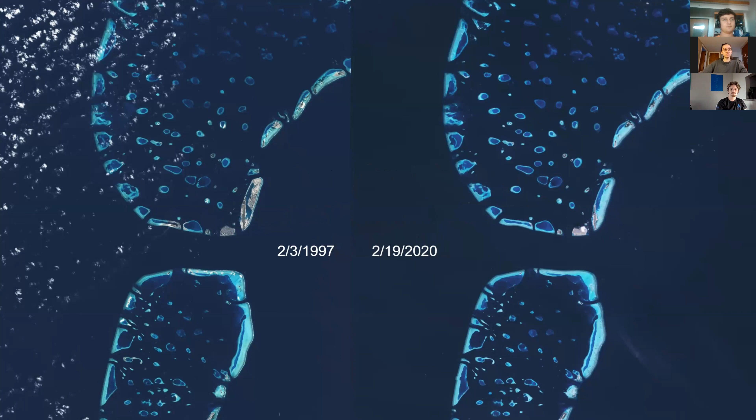I wanted to show this picture first. These are two images of the same shot of the Maldives. The left picture is from 2020 and the right picture is from 1997, which I found kind of interesting, and I actually captioned it the way I initially would have thought. On the right, there's not a lot of island left, but on the left, there's quite a lot more populated area, which doesn't make a ton of sense to me, because the Maldives is less than a meter, I think they said, above sea level.

So they are at a very high risk of being completely underwater by 2050. There's a pretty large chance of that happening. So they are working to build artificial islands. This right island is an artificial island. I'm not even going to try to pronounce that. But they are doing this by digging up sand from the seafloor and pumping it up to reconstruct these islands, basically just make them taller.

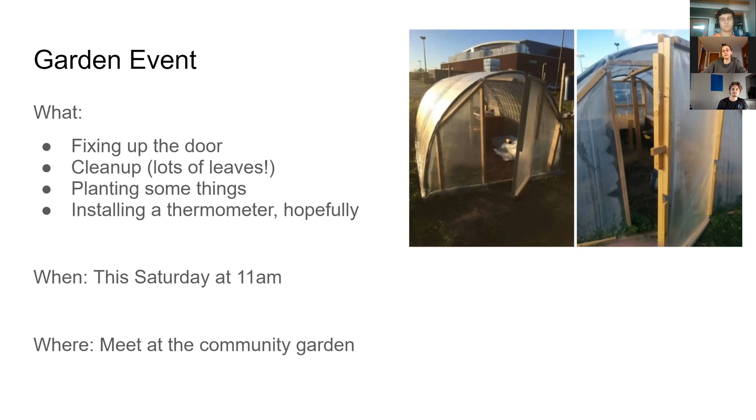Next thing is that this Friday, RIT Sustainability and Net Impact are pairing to, I believe they're doing actually every Friday in Earth Month in April. They are going to be showing a sustainability movie. This is a documentary that talks about social entrepreneurship and sustainability economics, and the triple bottom line that businesses are really striving for. It seems like a really interesting film. So that will be Friday in Wegmans Theater, which is in the Magic Center, at 6 p.m.

I don't think I put a slide for it, but I did want to mention now, I believe it is the evening before, next Thursday is the recharge day. So I believe Wednesday night will be an event that the RIT Sustainability Committee is putting on, called Lights Out. It's basically an attempt to get everyone in dorms to shut their lights out for an hour.

Earth Hour is a different thing, that's actually in late March, but we wanted to do this for Earth Day. I believe it will be either 7 to 8 or 8 to 9 for that Earth Hour. They're actually going to be monitoring how much energy is being used by dorms around that time, so we can see the actual quantity of power saved. I believe there's also going to be something happening out on the Greek lawn at that time, so just so you guys are aware of that. I will have more information on that next week.

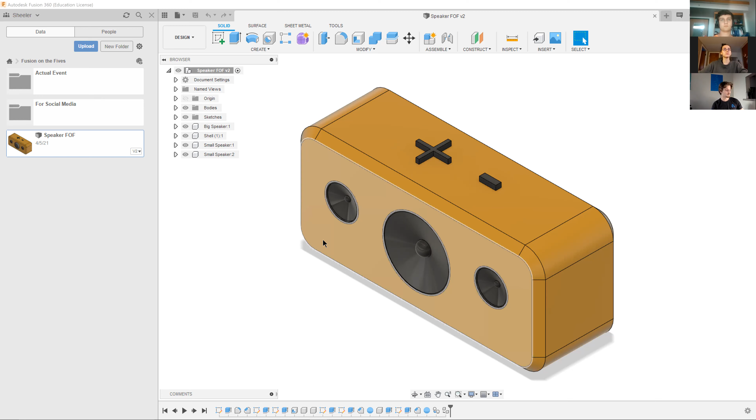So yes, what I have for you today is a speaker, a little bit of a portable speaker here. This will give you a good overview of what to expect within Fusion. We will cover a variety of different things going on here. But to jump into Fusion, I don't know how many people here have done SolidWorks or Rhino, or if you've never touched CAD, that's completely fine. One of the ways I like to look at it is once you've learned one CAD software, it's like learning another language. While sure, there may be some differences, you may be able to connect the dots where some things maybe overlap and be familiar of what you've seen before.

The way Fusion is set up is that it's very user-friendly in the sense that when you're welcomed to the program, you have a setup that will be welcoming you to tools that you'll be using most frequently. At the top, we have our solid modeling tools where create sketches, extrudes, we'll cover all of that in a quick second. Over here are where all your components are, where you will be able to model different aspects of the speaker itself, we have that over here.

At the bottom, we have a timeline, so if you do want to go back and edit something, if you want to go see what stage you were a few minutes ago, you can go back in time and visualize how it all comes together. We can also click progressively through here to see what we'll be working on here today, as it comes together.

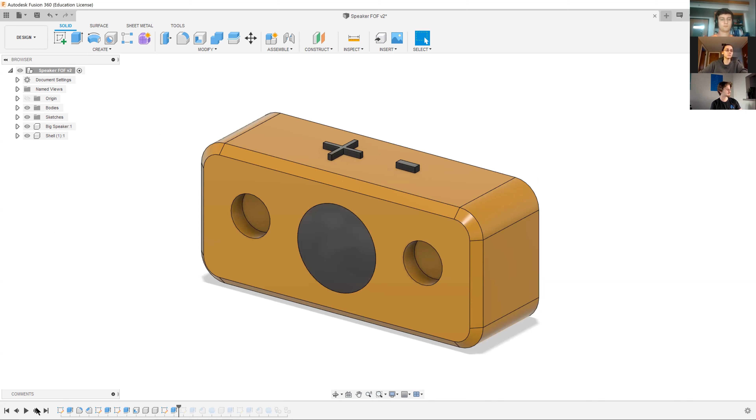Then over in the top right, we'll have a view cube, which you can drag around, or you can also click Shift and the mouse wheel and drag your model around. And if you want to select the front face, you can select the front of the cube, if you want to select the top, you can do that as well.

Just to kind of gauge with who I'm working with, do we have people that are following along or just sort of watching today? I think just watching for the most part. Okay, otherwise I'll go ahead and take progressive breaks, just stop, let people catch up. Otherwise, I'll just be going along with it. Sweet.

So we're going to first off start with creating a new document or a new file. We'll hit the new design up here, we can also go File, New Design. And we are going to name this Fusion event and Fusion demo. Today is the 13th.

When we save in Fusion, one of the great things is that it's cloud-based software, so when you save something, it saves to the cloud. If you log in on your computer at home or at school, you can transfer your files. The other benefit is that teams can work together on files, sort of like Google Docs, where everyone can add in different parts in different areas. That's another part of Fusion worth exploring if you have the opportunity.

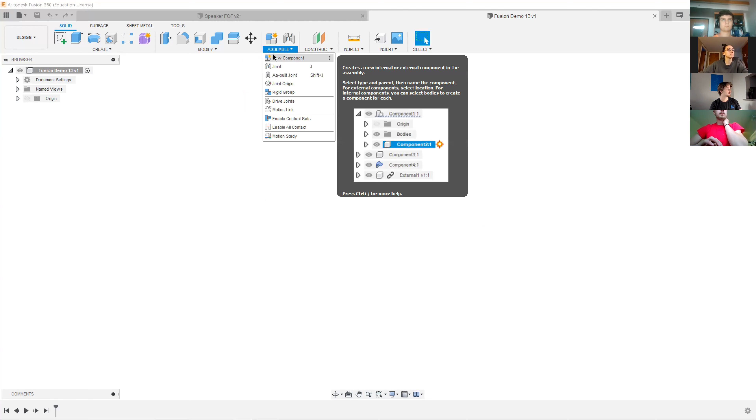So we'll go ahead and save it in our project file. Now we have our file ready to go. The first thing we're going to do is create a new component, and this will create an assembly. That is our parent component.

There are three kinds of breakdowns of parts within Fusion 360. You have your assembly, which is at the very top, which is your whole model. All your parts are combined together as one object. So if we turn that off, that's what we turn off.

The next step down is components, which are the modeling parts that you can combine and put together. The last one is bodies, which are sort of the blobs and parts that go together to create a component. So let's say you had a cylinder and a sphere - rather than those being two separate entities, a component is able to take those two bodies and put them together into one part.

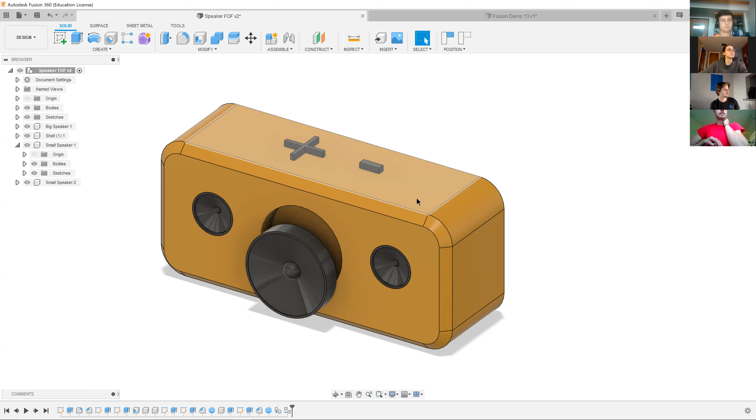So that's what we have going on here, where we have a sphere and a cylinder that have been combined into this component. Same goes for this main orange body here, where we subtracted from it and have both fillets and chamfers on it, and that's how we get our next component.

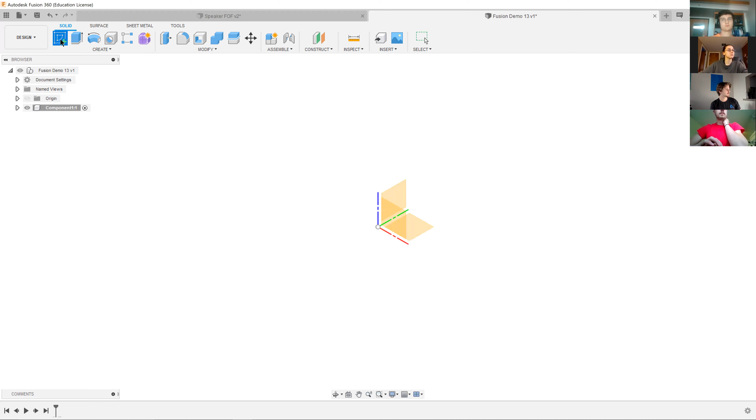So the first thing we're going to do is create a sketch. We're going to go to the top left or hit S. What we see now is three different planes that we can work on. So what we're going to want to do is select the front plane.

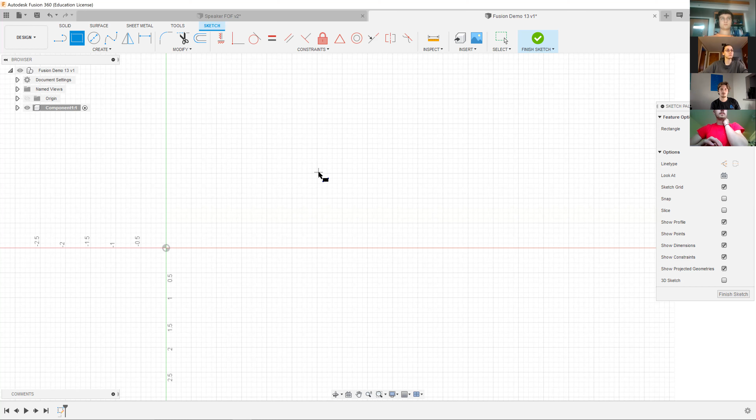We are going to go up to the top again and make a rectangle. Now we could click it anywhere, but what we want to do is, when we create objects, have them locked down in place. So I'm going to select the origin so it doesn't want to move on me. I'm going to zoom out a little and go big.

So now you'll see, maybe for those who have done SolidWorks, something similar, where the lines that are black are ones that are constrained - they don't want to move. The lines that are blue are the lines that do want to move. When we're creating objects, we want to try to constrain this object in its entirety.

So we want to go ahead and add some dimensions to it. But before we do that, we want to make sure what kind of unit we're in. Today we'll be working in inches, but if you wanted a different unit, we can also switch it over to centimeters or millimeters. It might be preset as millimeters, but we're going to want inches today. We'll hit OK on that.

Right? I think it's because I'm in inches that it's doing that. All right, cool. So the next thing we're going to want to do is put some constraints on this.

So we can go up to where we have our rectangle and go to the dimension icon, which is our sketch dimension tool. Also hit D as a keyboard shortcut. Now what I want to do for this is have this be 6 inches high, and then for width, I'm going to set it as 18 inches.

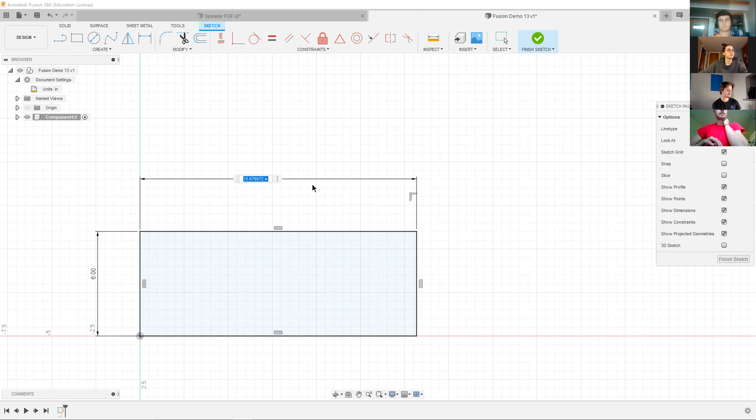And once I'm done with this, you can see that everything is constrained. I'm going to hit Finish Sketch.

So now we have our 2D plane. We can either mouse wheel and shift to drag around, or we can use the cube to see that we are in a 3-dimensional space right now.

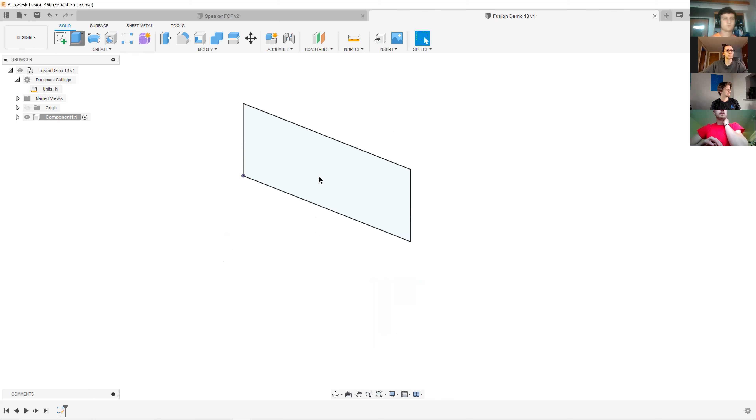We'll go ahead and drag this out a little bit to add some dimension to it. I'm going to make it 6 inches in depth, and I will hit Enter. You can see that we have made a cube.

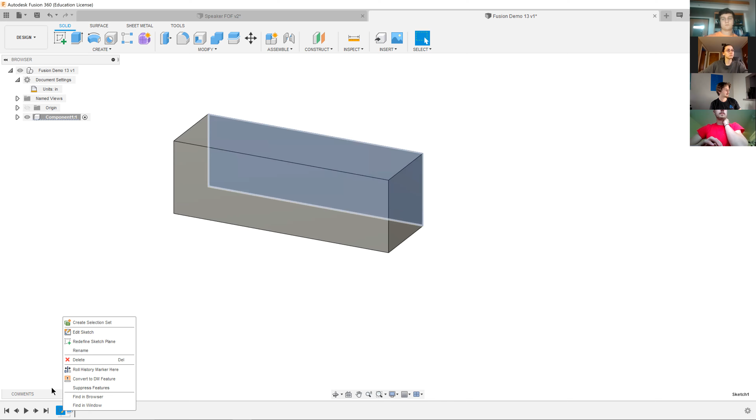Now I'm looking at the proportions of this, and I'm not entirely sure that I like what I've created so far. The reason I'm bringing this up is that when we have something like this that we want to tweak later on, we're able to go back within our timeline on the bottom and edit it. So if I right click and edit sketch, let's say I want to have this as 16 inches instead, it very easily updates, and you can see that now our rectangle is 16 inches as well.

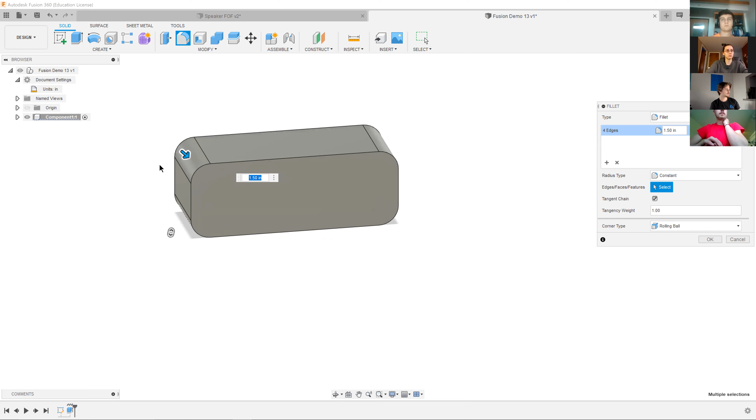Cool. So the next thing I'm going to do is add some fillets on the edges of this. I'm going to select the fillet, which is above modify, and select each of these outside edges. We can either type in a dimension over here, or we can eyeball it and drag it to the size we like. I'm going to have it as 1.5 inches. Enter.

We have some less sharp angles on it. Now to introduce another command, you can see that when we begin to enter the drop-down menus, there's a lot more to Fusion than just what meets the eye when we first began Fusion. We have all these variety of options.

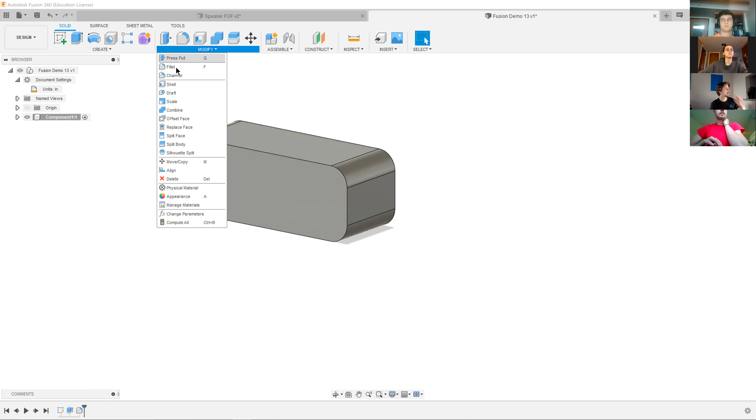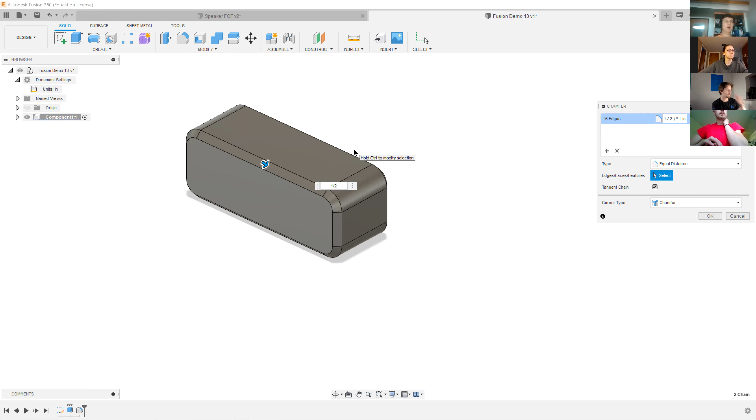What we're going to want to do is add a chamfer onto the front and on the back edge, again just like the fillet. That's a little too much, but we are going to make it 1/2 inch instead. You can either type in decimals, or you can actually have the program do math inside it, so you can do either fractions or decimals. There we go.

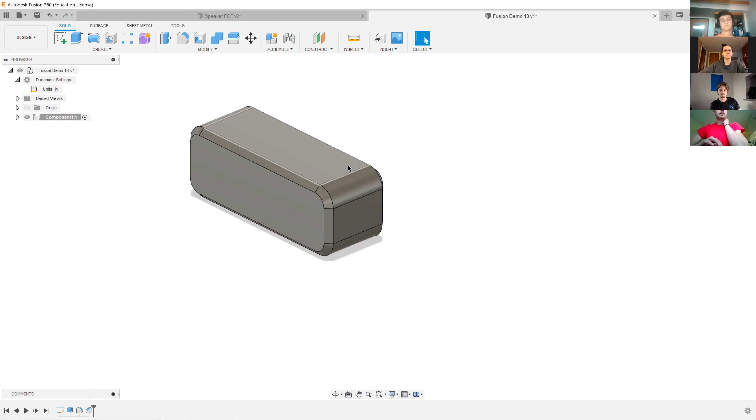Cool. So the next thing we're going to do is when we take a look at what we're trying to achieve, I am going to add the volume buttons on top.

Now, to add that, I'm going to add a sketch. Just like we did before with that back rectangle, we can select a face. We could even do this on the chamfer face, and add some volume buttons that are maybe more pointed at you, but we're going to do it at the top. You can see that the grid is positioning right where I want to put it, and we are on top.

Now I could draw out a plus and a minus, but for the sake of this exercise, I'm going to introduce you to how to add text onto your speaker. Before I jump into text, it's important that we anchor it down.

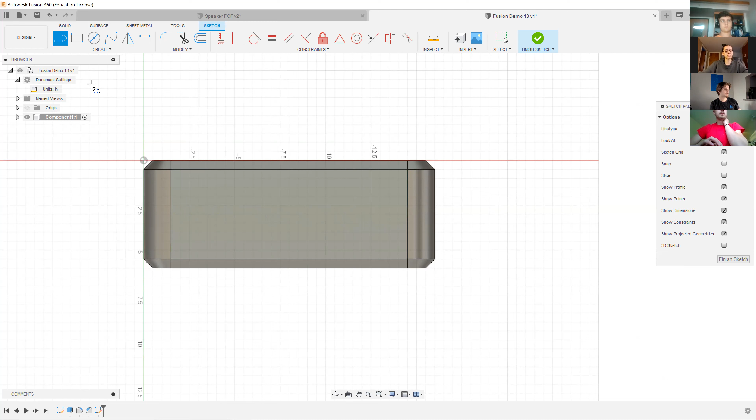So I'm going to add a center point. Now, putting down lines, I don't want the lines that we had previously. I want to have construction lines to help me position that aren't going to show up on the actual item. So the way I do that is we also have this menu over here with the sketch palette, and what we want to do is change the line type to construction.

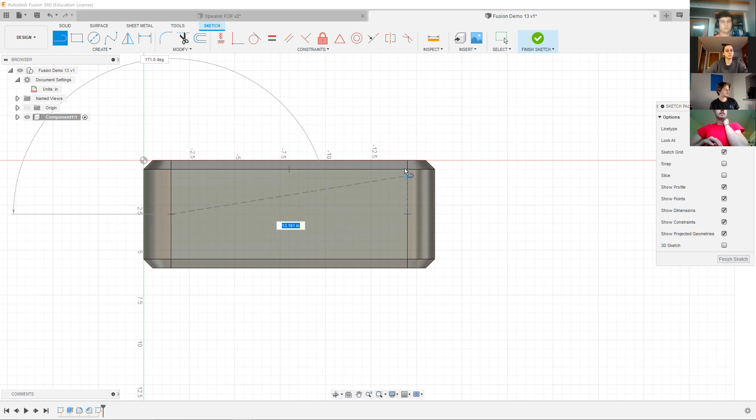So what we have here is you can see that now I'm drawing a dotted line, and I can hover over - do I want it in the top corner? It'll show a blue rectangle, and if I'm aiming for midpoint and perpendicular, it'll make those symbols as shown there. I'm going to do from the top to bottom as well, so I know that this is the midpoint, and I'll hit escape to get out of that command.

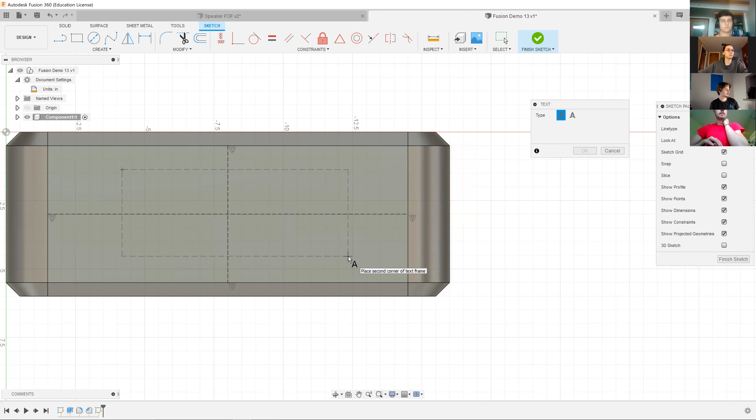Now to add the fun part, the text. I'm going to draw my text box in here. Zoom window. And for my alignment, I'm going to do center and align to middle.

For the text box, I'm going to do plus or minus. You can see how Arial - let's see, for height, I'm going to make it an inch. There's a lot to play around in here if you want different fonts.

Accidentally clicked out of it, so I'm just going to jump back in that menu by double clicking it. Now, I'm not sure I want Arial as my font, maybe something a little more dramatic, so we'll go for something like that. An inch is still not quite what I want - keep going a little larger.

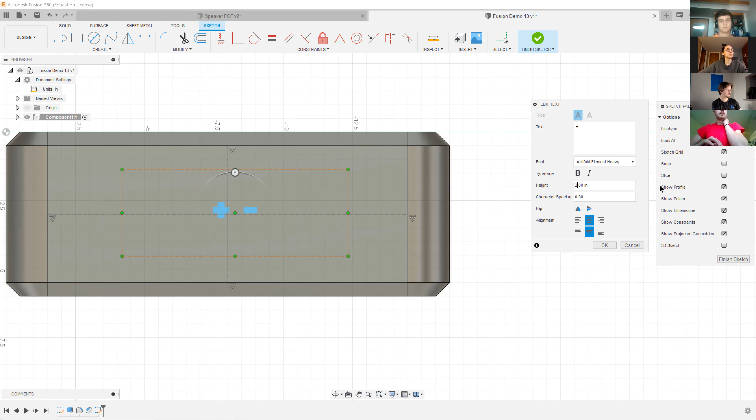And you can see that we can drag around our text box, and I want this point to be anchored there. We'll hit Finish Sketch.

And we have our sketch plane on top. Now, still 2D, and we're going to go ahead and extrude our text that we have there. So I'm going to do 1/4 of an inch.

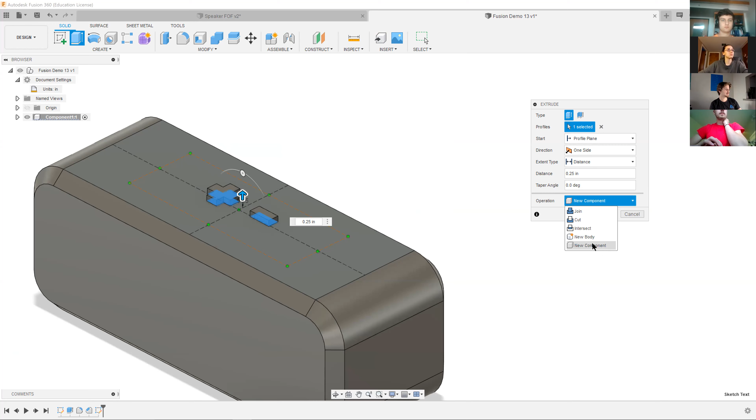We can either join this to our main component, but I'm actually going to make it a new component so that when we add color later, it won't turn orange with the rest of the body. These will represent separate buttons. So instead of a new body, I'm going to do a new component, and we'll hit OK.

Now it made a component inside of this assembly, creating these 3 objects in the assembly. But what we want is to drag this component back to Fusion Demo, so now you can see we have this component and this component underneath this assembly.

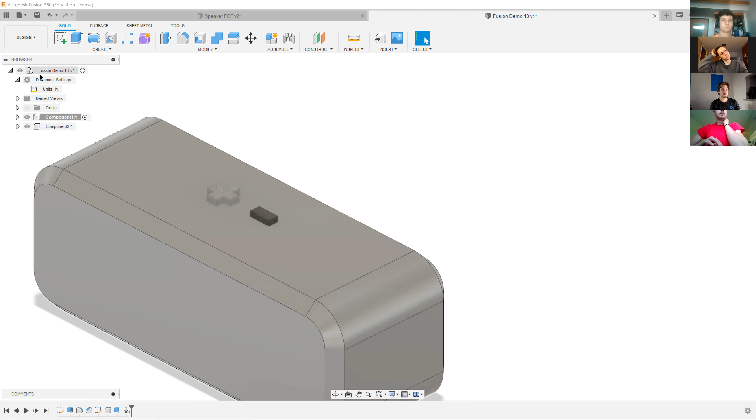Another thing to keep in mind is that now that we have multiple components, it's important to be working on the one that's active. To make it active, select the little dot next to it. So if we're working on the volume buttons, we'll have that selected; if working on the whole thing, have it all selected. Of course, we can always rename these.

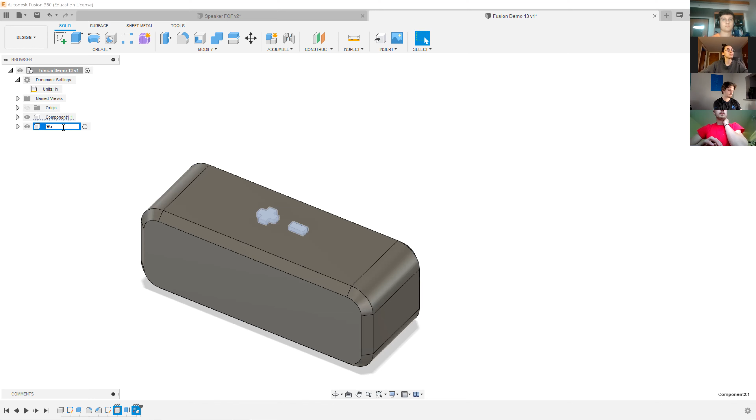So now I'm going to go back to make the base layer active so we know I'm working on this one. Another thing to note is when you select a different component, your timeline responds to that component rather than everything you've worked on, which makes things easier once you have a lot of components going on.

It combines everything, but if you just want to work on one part, it's easy to switch back to that. Next I'm going to create a shell, which will let me put the internal components inside so there's room for the internals. Actually, I'm jumping ahead—we're going to do that after this next step, sorry about that.

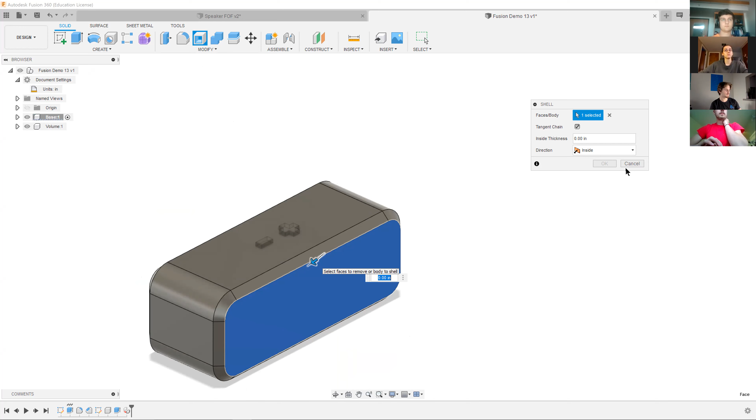We're actually going to create where the audio comes out. Create a sketch on the front plane, and we are going to create 3 circles—one for the base, and these 2 smaller ones.

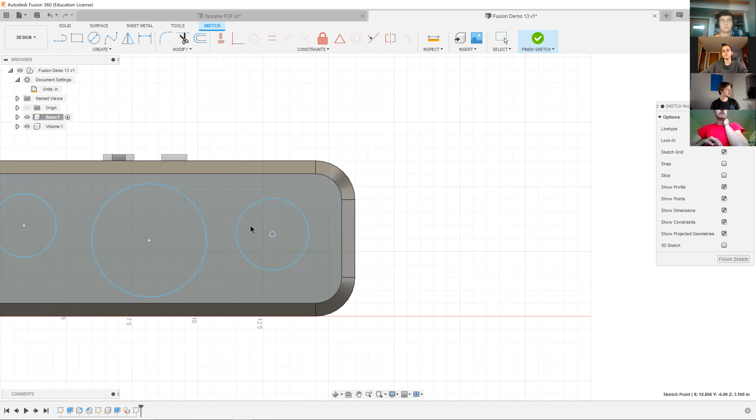You can see that these are just floating around, and I don't want these floating around. We can actually reduce our workflow by introducing another lesson, so I'm going to delete this if it wants to.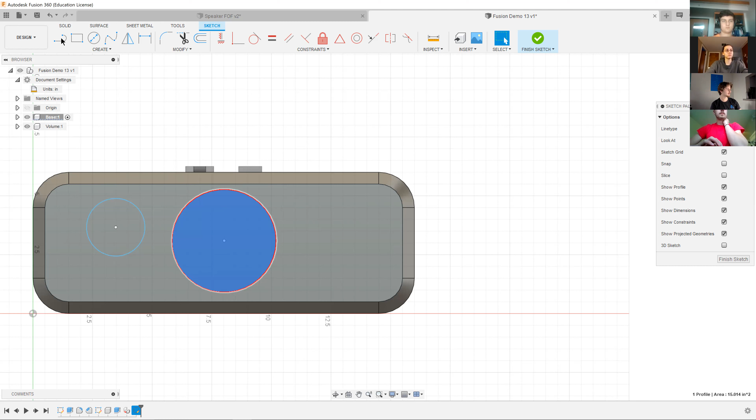The way I also do that is by right clicking on an object instead of constantly going up to the top bar—it gives you another menu that tries to guess what you're doing, maybe the command you just did, like delete, repeat delete, or pull this. That's another way to save time with small hacks to make life easier. So the first thing I'm going to do is center the circle and create a construction line.

I'm going to go to the top, try to find that midpoint—there it is, the triangle—and snap it to the bottom. I'm able to drag this around, but that's not what I want, so I'm going to drag it to the center point.

Now we have this column of all our constraints. So if I'm looking for something to be tangent, coincident, or a midpoint—midpoint is actually the one I'm after. I'm going to select the center point of this and the midpoint and the center line here. It's going to find the midpoint of those 2 parts and automatically snap it to the center. So now all that's up to me...

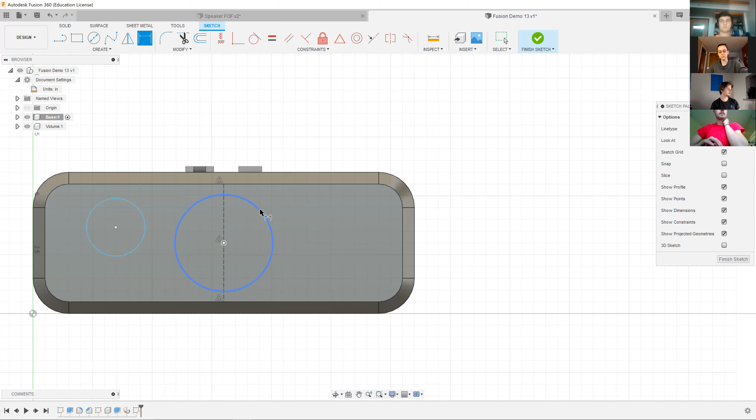...is deciding the size of the circle. I'm going to select the circle, but I'm not just going to type in a dimension for it—I'll decide whatever constraint I want later on. Just going to make the circle 5 inches. Too big. 4.5. Cool.

The next part, I'm going to add this—I'm going to anchor down this speaker, which I'll do by first creating a dimension from the center point here to here, and I'm going to make it 2.5 inches.

And from the top, same thing, 2.5 inches. Now for the size of the circle, 2.5 inches. Why not?

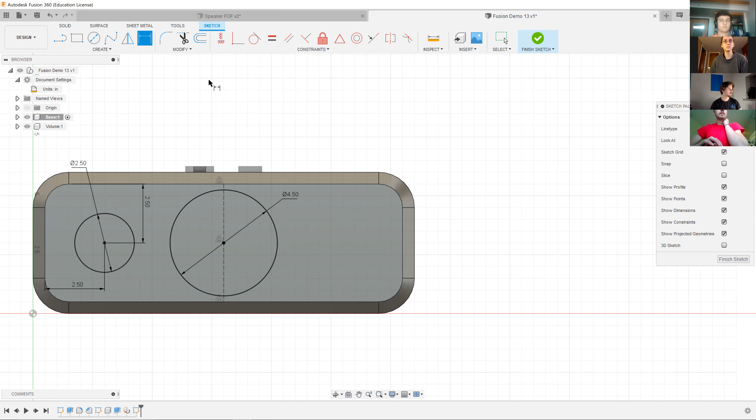Now I could go ahead and redraw this, do 3 dimensions on this side, but I don't really want to do that. The easy way to do it is to use the mirror command to mirror this circle. First, select the object and the mirror line, which works out great because we already drew that out. You can see that it immediately draws it over to the other side.

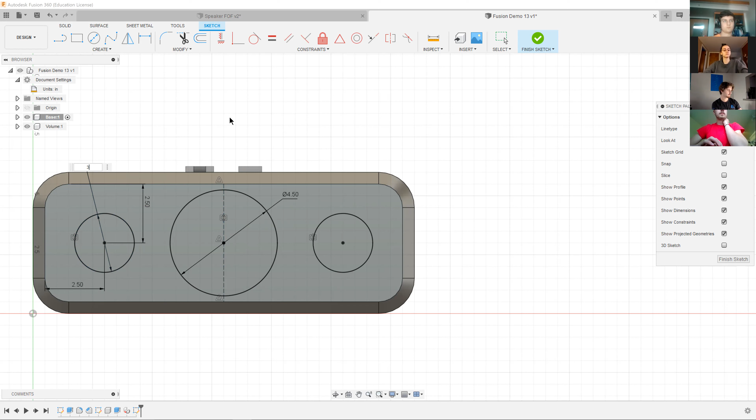One of the benefits to this is that if I want to change the circle to 3 inches, it automatically updates on the other side as well. That looks pretty good, so we will finish sketch. And now we have to extrude it.

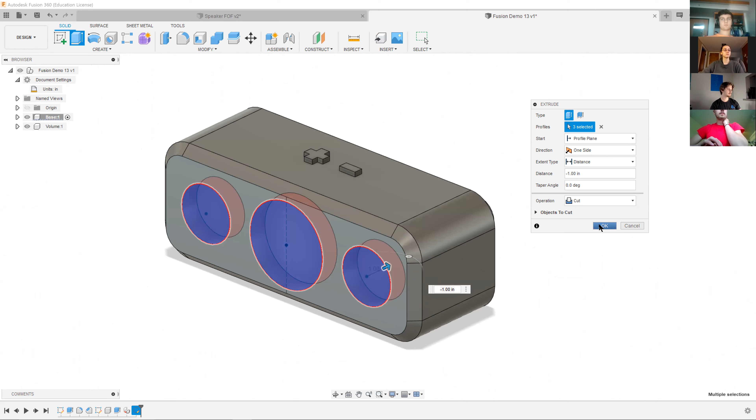While we created an object last time, this time we're going to subtract. We are going to go back 1 inch. We'll hit OK. Sweet.

Now, what I jumped a little ahead to last time was I wanted to shell the back for all the components. So again, on the modify tools, I'm going to go to shell, select the face we want. This is actually kind of fun. I'm going to type in 1/8 of an inch. What it's done is taken the shell of the inside, including the speakers we have here, and we'll now be able to put some inside guts into it. Hit OK.

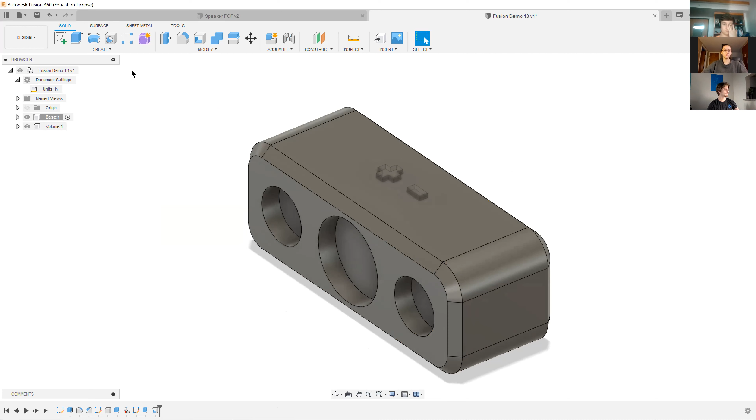So the next thing we're going to do is create the speakers we have inside here. What we want to do is create a new component, so we're going to make this part active of everything we're working on. Assemble, new component. That's the back one, so we are going to hit OK.

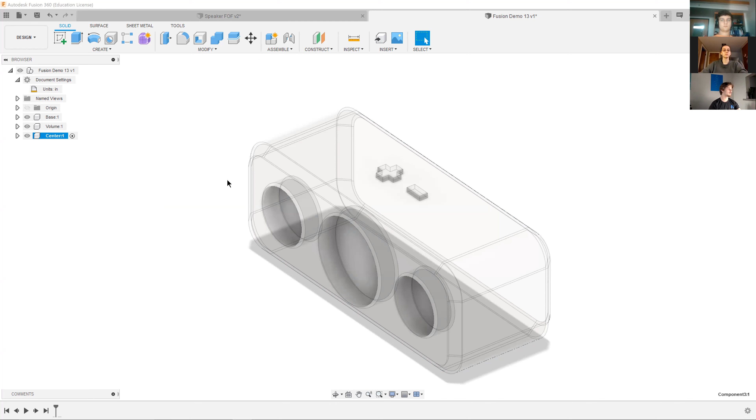And we have a new component that is able to be edited or begin on its journey. So I am going to create this as center, which will be where we create this back panel, or the center speaker. So we have this active. You can see we have this ghost of the speaker in the background, and we are going to begin by creating a sketch on the speaker plane.

We are going to actually—sorry. One helpful thing: if you have something on another component and you want to bring it to this one, you can hit P, which is the project command. So that makes this outer circle now onto this plane, so I can have and work on this circle as well. That's all I need there.

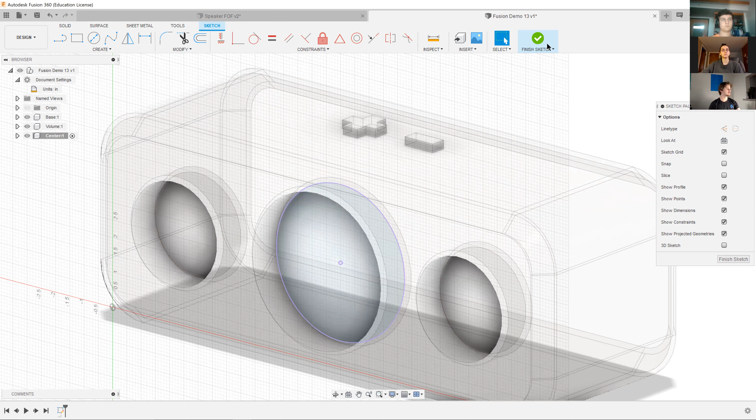I'm going to hit finish sketch and extrude. Now, I've kind of been avoiding everything else in this menu, but this is where it's helpful to start looking at what else Fusion has to offer within this command block.

Instead of entering 1 inch, which is what we know for how deep we went back, what if we change the circle in the future to 1.5 inches? We want this to automatically update too. So instead, under extent type, we can go to object. This asks us what object we want to go to, and we're able to extend all the way to the front plane. We'll hit OK. So now you can see no dimensions were added in.

It was just a matter of making sure that this face is flush with this face.

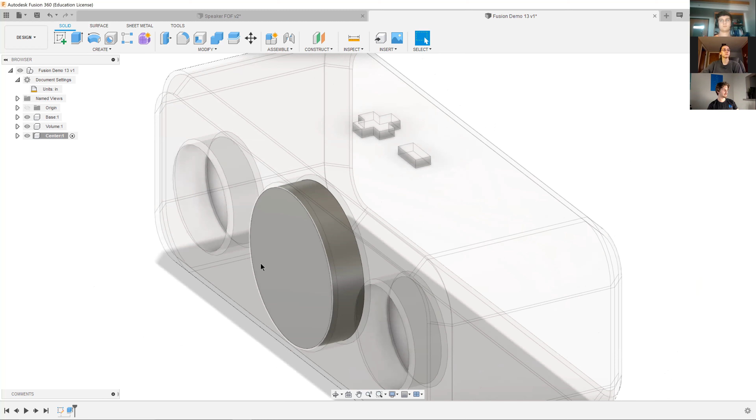Now we're going to create another sketch, and using what we just learned, we're going to use the project command by hitting P. We'll hit OK. So now we have this purple line, which is the circle that we have behind there.

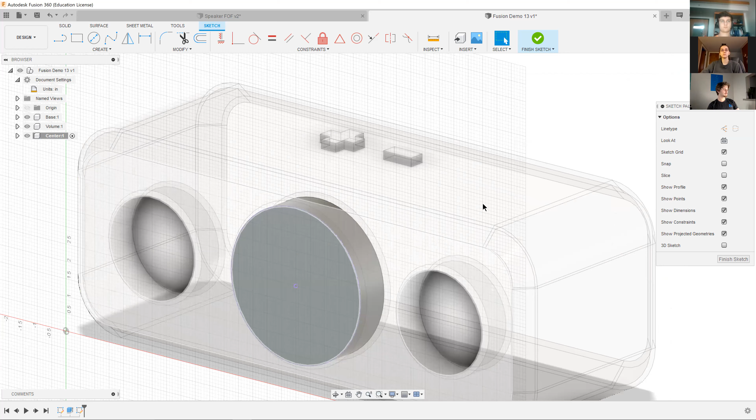Introducing a new item we haven't gone over yet: the offset command. Under modify, we're going to select this circle, and we just want it to go in a little bit. I'm going to say 1/4 of an inch. But you can see it went the wrong way there. The way to fix that is you can either do -1/4, or you can just flip it and it goes inside. We'll hit OK.

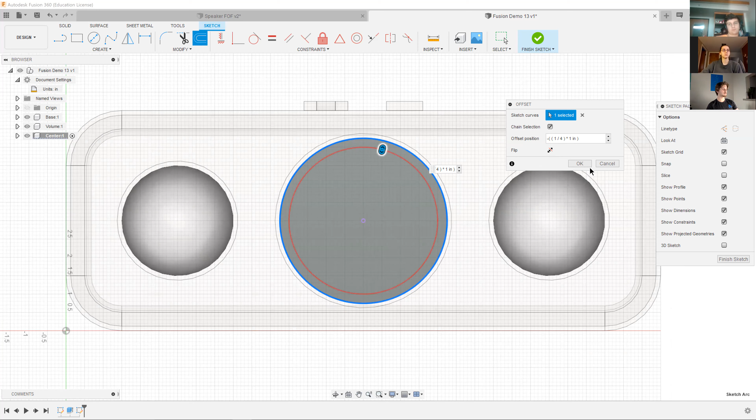Now, the reason we did that is so that we can create some depth within the inside of the speaker, so that we can use the modeling tool, the chamfer, to create this kind of shape we have going on, to give the representation of, hey, this is a speaker.

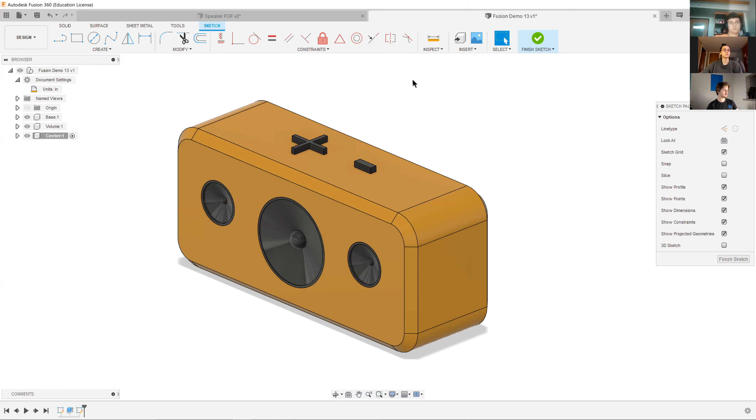Now what I'm going to do is finish the sketch and extrude again. This time I'm going to cut in. Just like last time where I didn't add a dimension, I'm going to do that again. But instead, I'm actually going to turn off my base since it's going to be a little in the way. And for the volume buttons, I only need this. I could cut all the way through, but I actually want to keep the back of this as well.

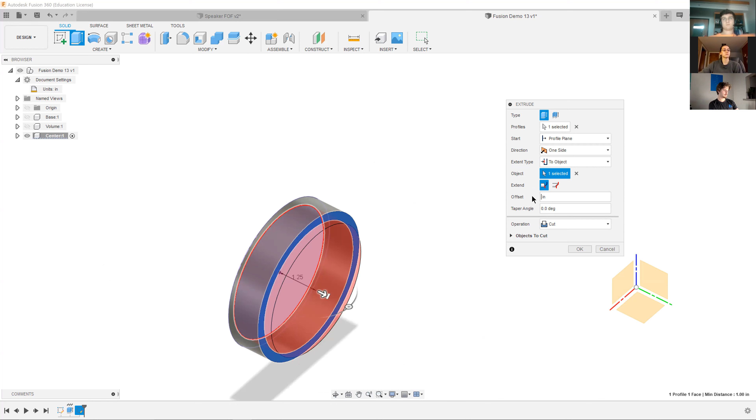So what I'm going to do is another offset object. I'm going to select this face, but it cuts all the way through, so what I want is another offset of the cutting instead of through. I'll have it go through up to a quarter - no, negative a quarter. Didn't like the fraction there, but -0.25. So you can see that it doesn't cut all the way through. But again, if I were to make it 1.5 inches larger in the back, this would always remain a quarter inch thickness in the back here. So hit OK.

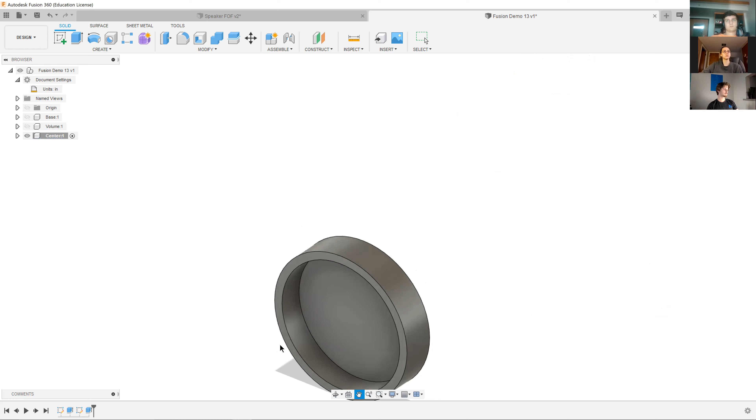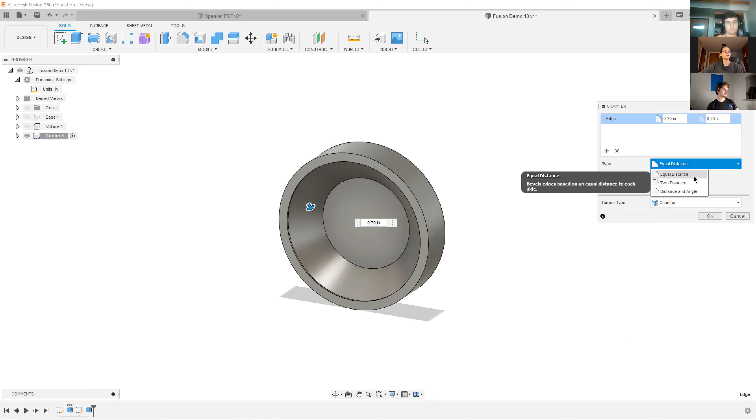Almost there. Now what we're going to add in is a chamfer, sort of like what we did earlier, but we're going to add a little more detail onto this one instead. I want to chamfer this inside edge, and we can drag it out, but it's keeping it the same on both sides because equal distance is set. So I'm going to change it to 2 distance instead, and now I have 2 arrows - I was able to drag this one here, this one here. Since we're going to add a sphere in the center here, I'll just kind of eyeball it and say that looks pretty good as is. Great.

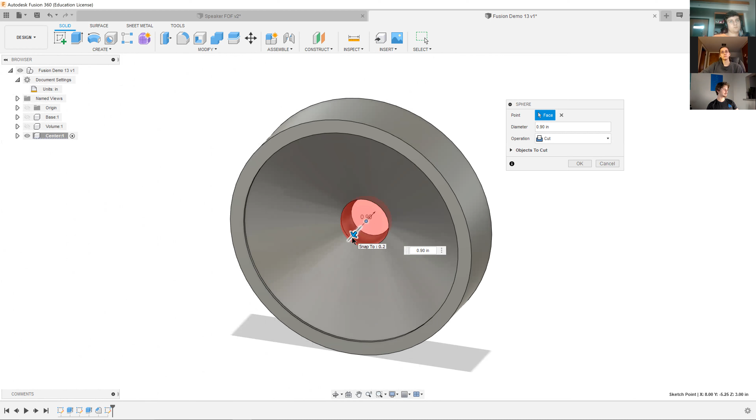Now I'm going to go to create - I don't know if I've dropped down this menu, but we can also create boxes, cylinders, spheres. We want the sphere, so we'll select that. The center of this circle is where it's going to create the sketch plane and the sphere. Let's decide the size - it wants to cut it for us, but we want to create a new body. Have it kind of small so it doesn't clip through the back. Nah, it's clipping. Let's make it 0.9, and so you can see that it fills that gap. It does clip through the back, but we'll fix that in a second. We'll hit OK.

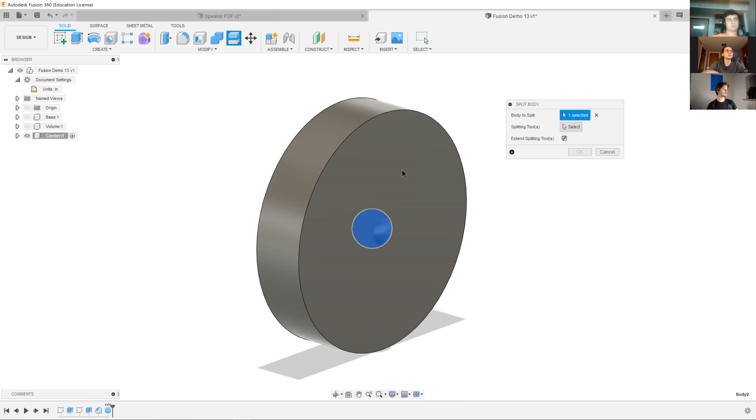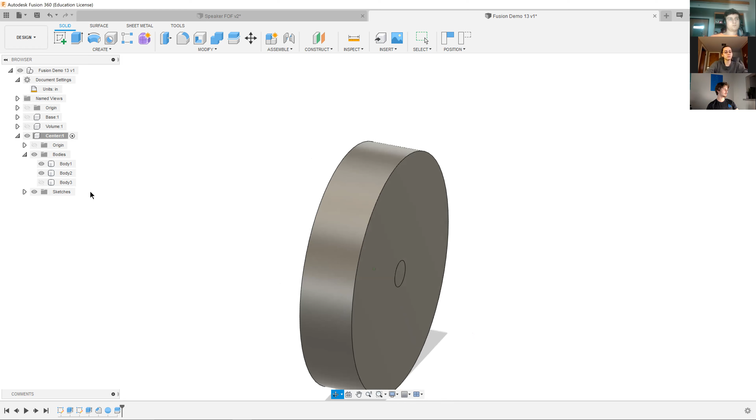Cool, almost there. We are now going to split this body so we can separate that little nub from the rest of this. Split body, bodies to split - this one here, splitting tools, it's going to be this here. Hit OK. So now you can see, did not do it. Let's check out our bodies. There we are. So when I split it, it changed the sphere from one body into two bodies, and we can view that over here. What I'm going to do is remove this body so that we no longer have to see it. And now that we have these two bodies that are combined - nope. Let's see, there we go. And we have our speaker there.

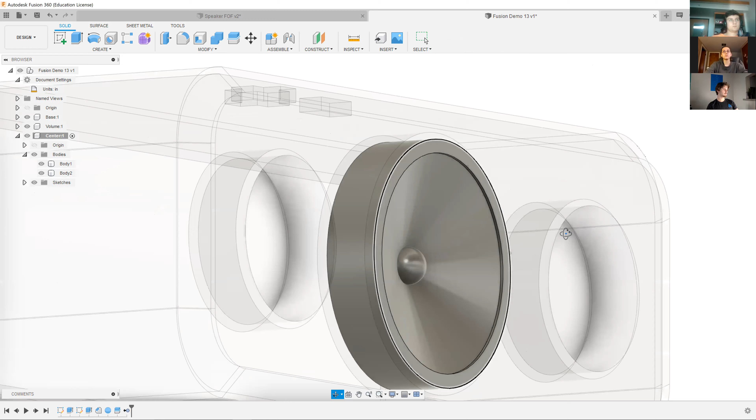So what I could do is go ahead and walk through the steps again to make another one here, and then mirror it to the other side, and I can go ahead and do that. But I was curious - up to this point, this is sort of the demo. If there's anything in particular you would like to learn about Fusion, I'd be happy to talk more about it, or I can keep going along with the demo. It's up to you guys. Don't know if there's something you wanted to see out of today in particular, or see again.

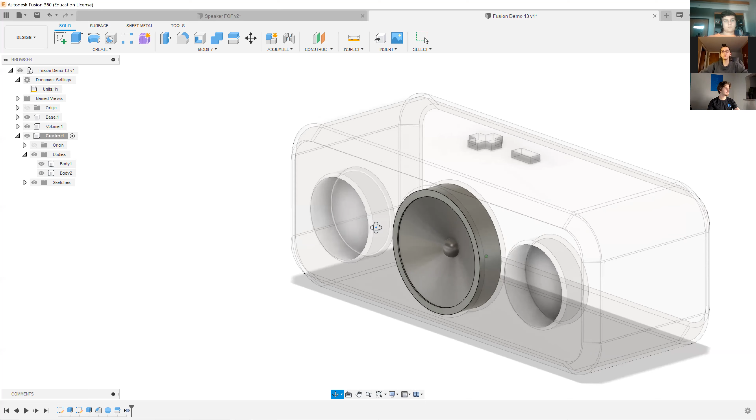I personally don't have anything in particular. Okay. Yeah, I'll just keep going along with it and repeat the steps we did over here, and see if there's anything different I can learn or share here.

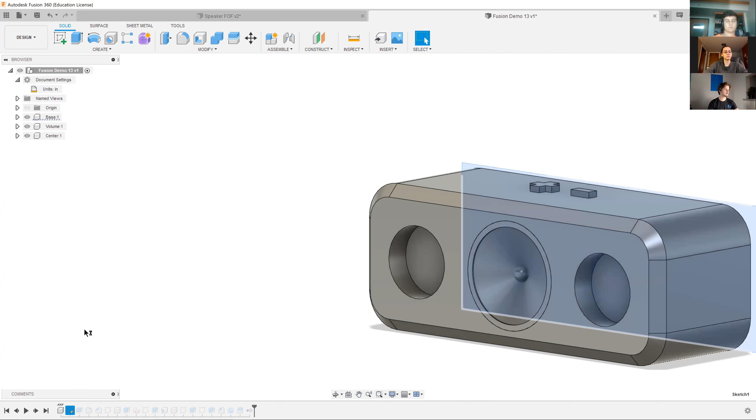So just like we did before, we're going to go back and make everything active. It's coming along. And just for the fun of it, I'm going to go back to the very start and adjust our initial sketch - make this 8 inches instead. So you can see how everything is updated, but for some reason our speaker, something's gone wrong here.

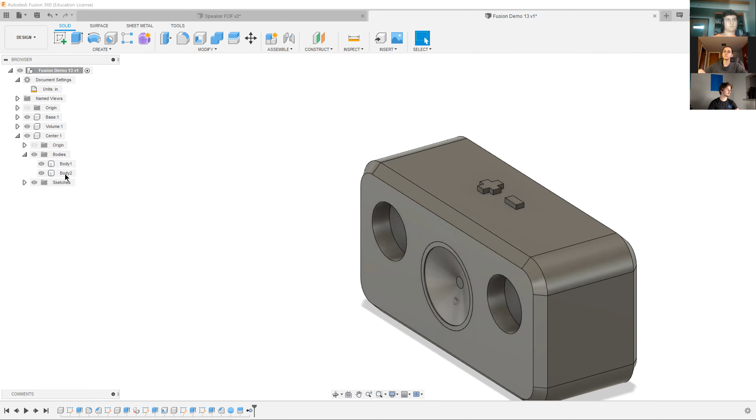So we are going to take a look at what's going on. We'll go back and make this level active. Turn - ooh, not that one. Let me figure out what's going on here. Sorry, one sec. I see, so I snapped to a different point than the point I would have wanted. Well, why aren't you letting me?

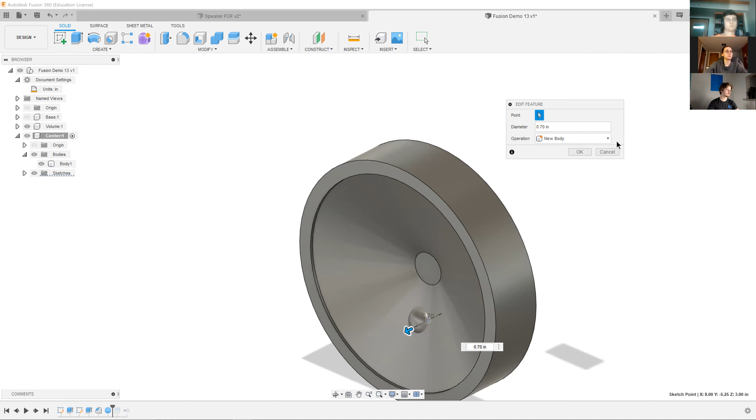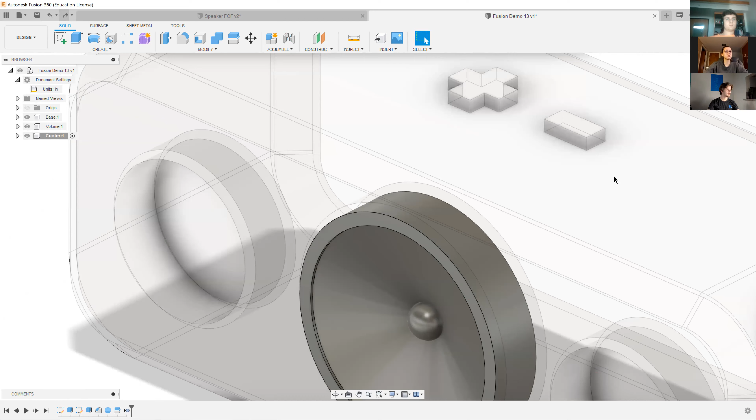A little confused about that, but one thing we could have done instead, let's see. Just keep moving.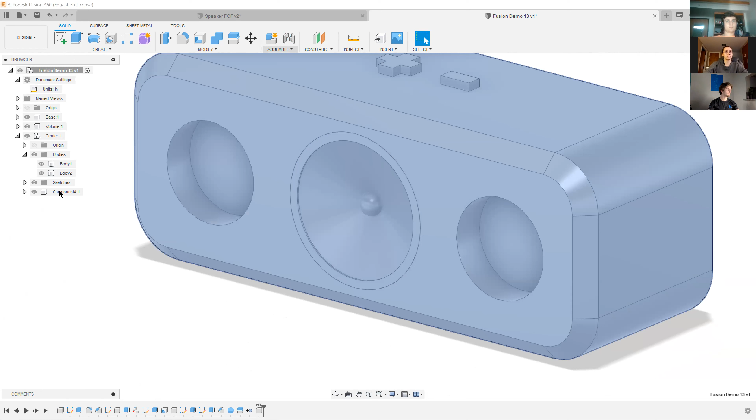For these two side speakers, I'm going to create another component. New component, have the parent be this one here, and we're going to name this one small speaker. I'm going to put it under Fusion Demo, so it's all under that assembly. You can have assemblies within assemblies, but I'm trying to keep everything in this form factor along our tree. And create another sketch.

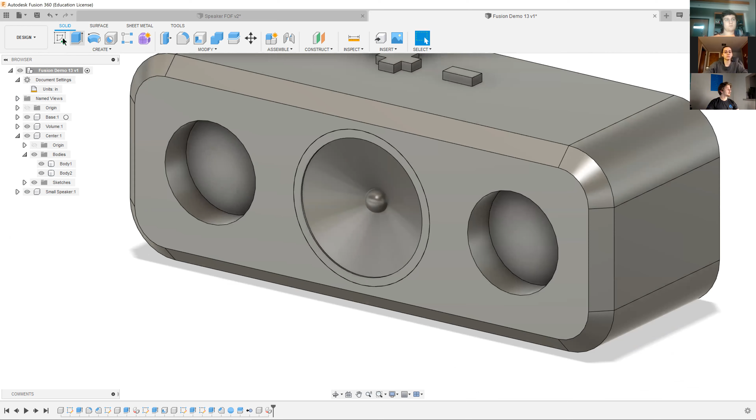Again, project the circle. Okay, can go a little faster this time since we know what we're after. Extend to object, so it's front plane, and new body.

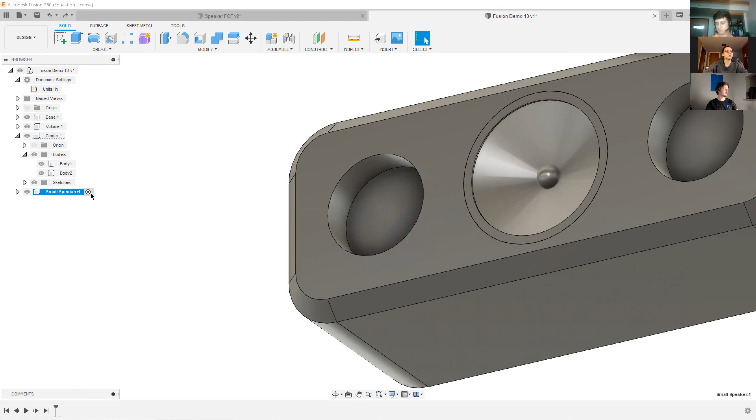What have I done? I see, this is where I accidentally started working on the main Fusion demo instead of the small speaker component. So the sketch is in the main tree instead of what we want in the small speaker. I'm just going to go back a little bit and make this the active level so we can work here. Just making sure you do that so it doesn't become a headache later down the line.

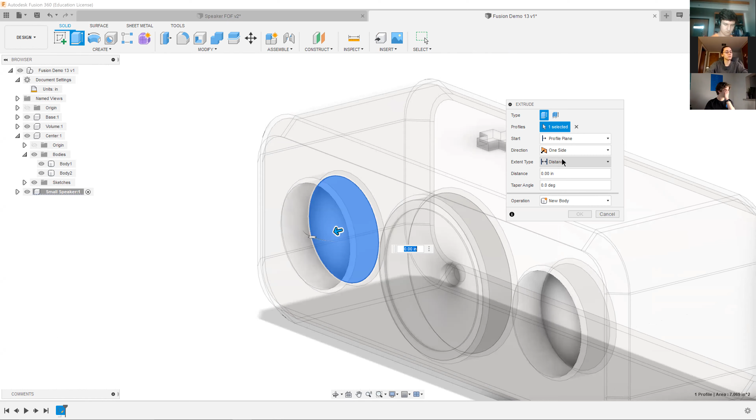So we're going to project the circle, hit OK. And we are going to extend to object, this front one, and hit OK.

Same thing, we create a sketch, project this outside circle. Okay.

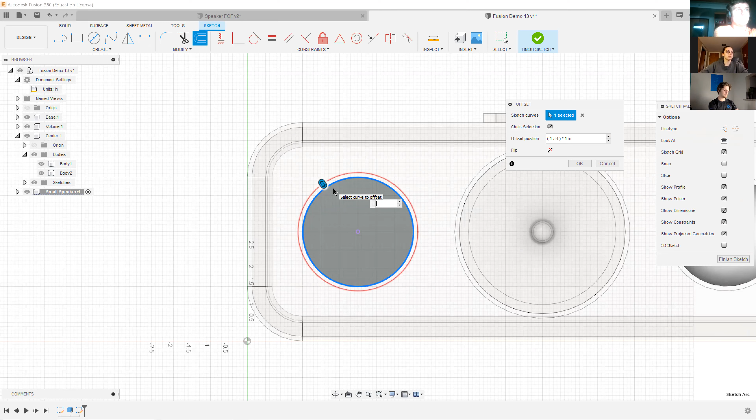Offset this, I'm going to do an 1/8 this time to keep it in proportion with the other side. Cool, finish that sketch, and extend to object.

Turn off the base so I can reach the backside. Offset it an 1/8, 0.125, negative. Cut it. All right.

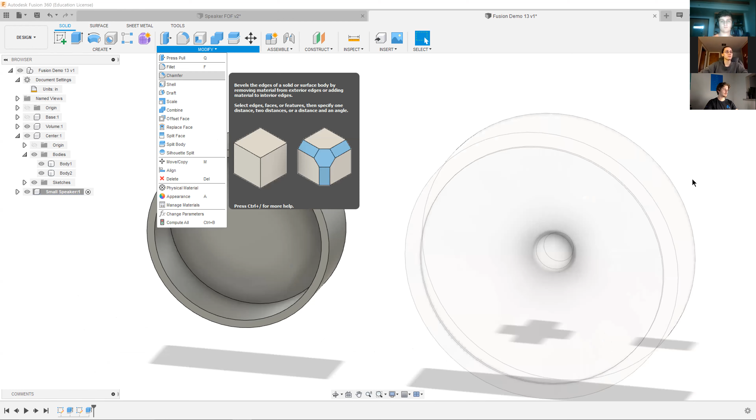And do our chamfer. Except here we accidentally hit fillet. Two sides, it already knows that it wants that.

So we're just going to do as such. Hit OK.

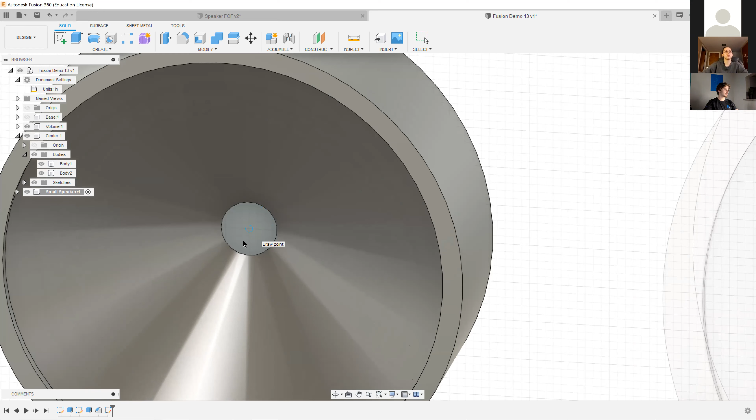And I'm going to add our sphere back in. Create the sketch plane. Join, so we don't have to combine it, and OK.

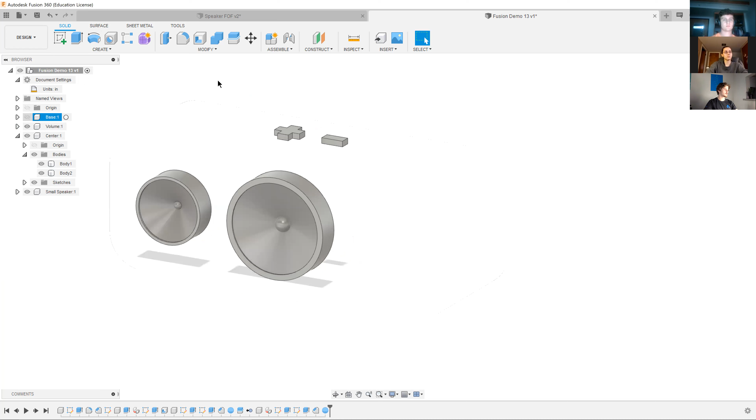And now we have just about our speaker, and we can create a copy. But to do that, to have this speaker mirrored onto this side, introduce a new section, which is all the planes that we can create.

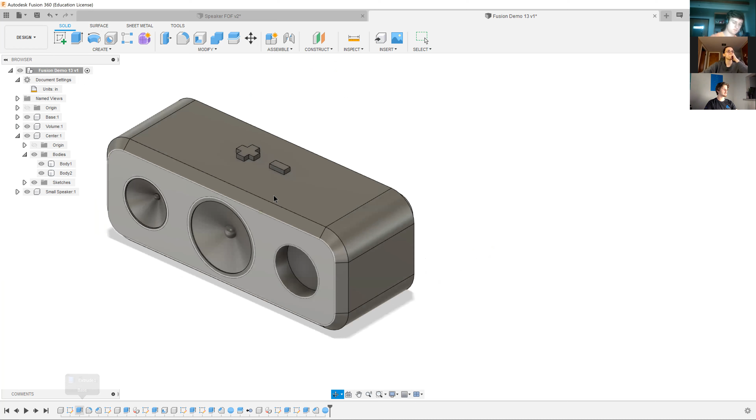We created our initial sketch on a plane, but if you aren't able to create a sketch on a face that you see visible, you're able to create planes that aren't previously there.

So in mid-plane, we want to create our center plane. We're going to select this face, and it's going to create a plane that we'll be able to mirror off of. So we'll hit OK.

Move copy, and what we want to do is select components. And we have a small speaker that we want to select. No, sorry, that's the wrong one.

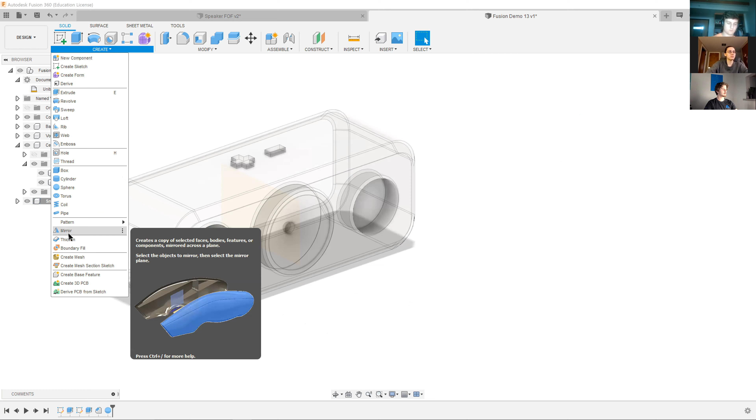Create mirror. So the mirror command is underneath here. Again, components, this component, mirror plane is the one we just created, except it doesn't want to give it to us, so it's hiding within the base. We're going to hide that and hit OK.

So you can see when we do that, everything is mirrored right on over.

So that pretty much concludes the Fusion 360 demo. There's still 15 minutes, but if anyone has any questions, I'd be happy to answer, or if there's something you're after or wanted to learn today, I'd be happy to go over it. Otherwise, I'm all set on my end.